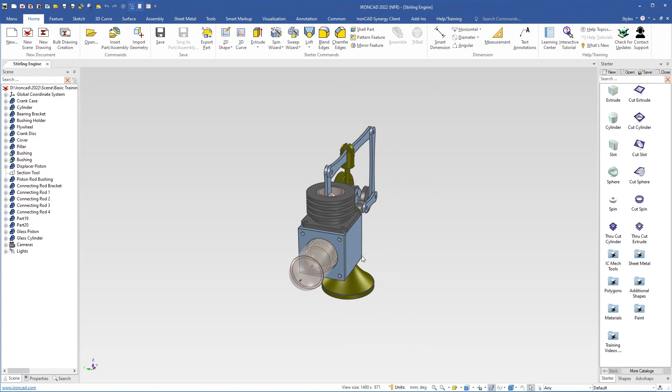Now it's time to prepare to fasten some parts here in the scene, so I will move the camera to cover, and we will add some threaded holes here.

So we come over to the catalogs and click more catalogs, and we will choose ICM Mech, and here we have the hole tool. I will drag a hole and drop it here inside this hole at the bottom, and here in this menu we will select this hole, size M4, length 4 millimeters. None of these boxes should be checked, but this one should be checked so that the thread call out to 2D drawing will be active. So when we make a drawing of the crankcase, this information will be added to the drawing.

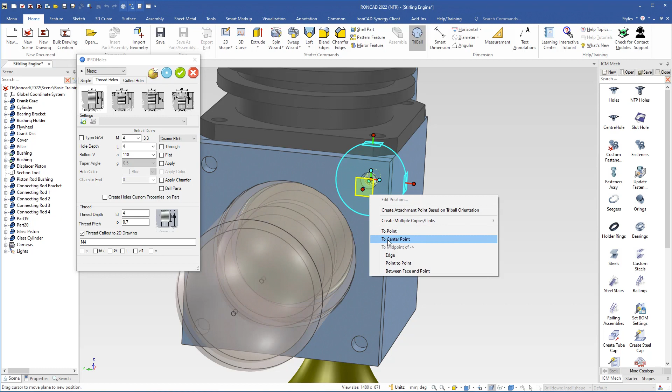So M4, length 4 millimeters, and then I will move this hole so it will be centered in this hole. I will right click this 2D handle, choose the center point of this hole. Then we need 3 more, so I will unlock the triball, right click the 2D handle, choose the center point of this hole. This will be the starting point to copy 3 holes.

So I will lock the triball, select this axis, and then I will right click and hold inside the triball, push, and drop it there and choose link. I need 3 more and 90 degrees. Then I will click OK.

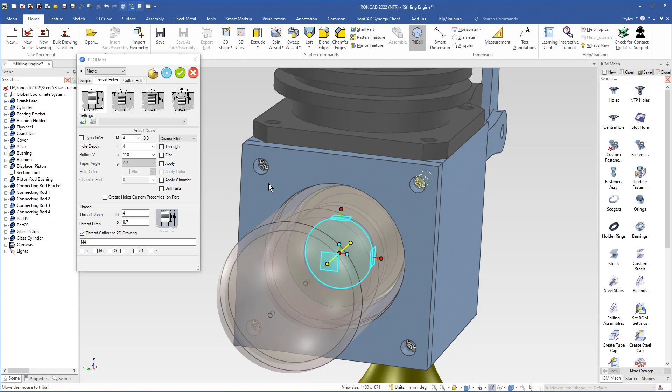Sometimes when you copy a threaded hole, the threads can look a little bit strange. If they do, you just click here the apply button and the threads will look okay again. So I will click apply and exit and turn off the triball.

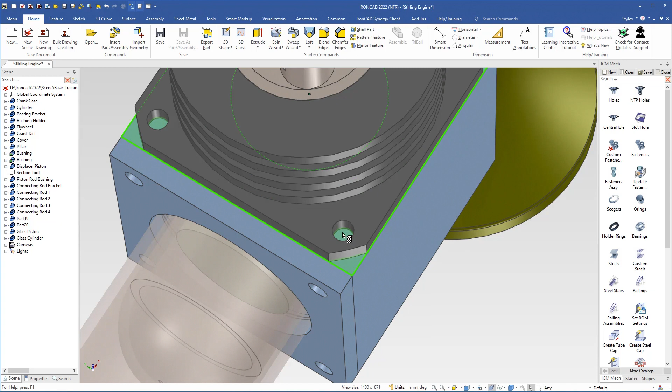Then we come up here, we will add some threaded holes here as well. So I will drag a hole, drop it here at the bottom inside this hole, and it will be the same size, M4, length 4 millimeters. This one is checked, and then I will right click this 2D handle, choose the center point of this hole.

And then I will copy 3 holes. So I will move the triball, unlock the triball, right click the 2D handle, choose the center point of the cylinder, lock the triball, select this axis, and then I will right click and hold, drag, and drop it there, choose link, 3 more and 90 degrees. Then I will click OK.

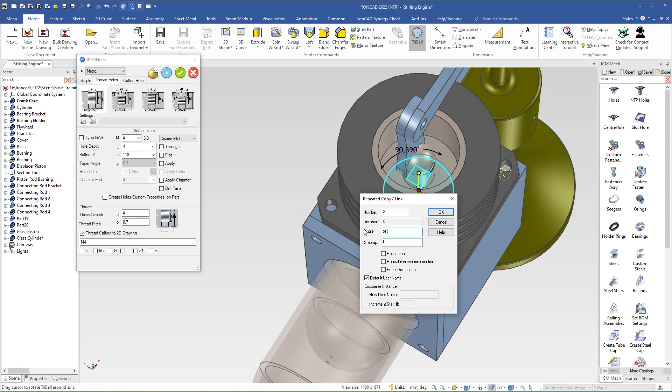And then I click apply and exit and turn off the triball. Then we will come over to this bracket here. We will also add a couple of holes here. So I will drag another hole, drop it here at the bottom.

And I will move the hole to the center. So I will right click the 2D handle, choose the center point of this hole, and M4 and length 4, and this one is checked. So now I will make sure that this 2D handle is selected.

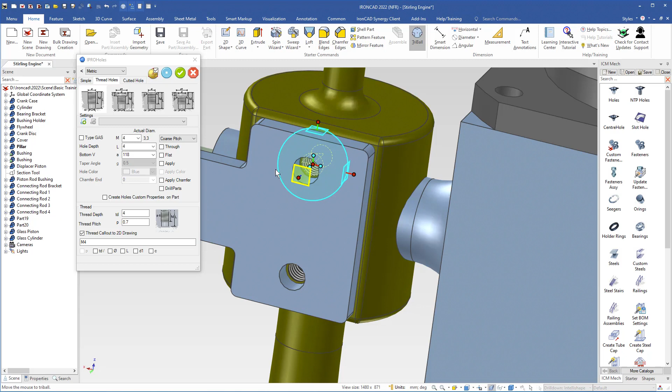Then I will right drag the center handle and use the shift key to snap to this edge, and avoid snapping to a node, because if I do and drop it here, it will be placed here where the node is. So I will snap to the edge of the hole. Here I will let go the right mouse button and the shift key, and then I click link and click OK, and I will click apply and exit and turn off the triball, like so.

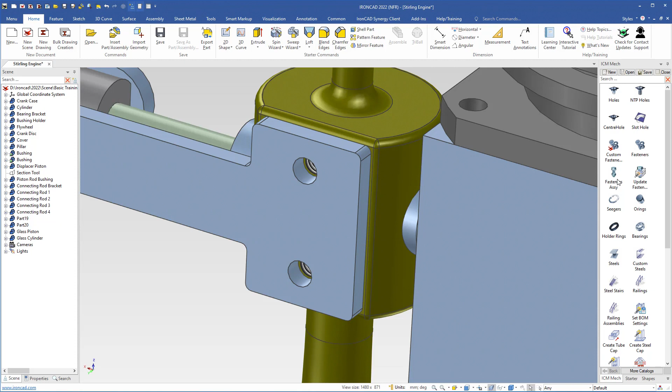Now we will fasten the bracket by using a fastener's assembly we find here in the catalog. A fastener's assembly will give us a screw and a washer at the same time. So I will left drag a fastener's assembly, use the shift key to snap it to this edge, drop it there, and when you do this for the first time, you will have a screw and several washers

and also a nut. But we will not use that type of screw, so we will come over here, click the screw here, then click this drop down button, and we will choose this one. Then we can click update or apply, and we come over here again, it should not be M5, it should be M4, and we can update. It will look like this.

But this washer will be active, but not this one, because we don't need two washers. So we click on this washer on this image, and then we deactivate the washer. Then we can click on this one, and that one should not be active because we don't need it, and we don't need that one either, and not a nut, like so. So now it will look like this type of screw and this washer.

That's all, so I will update it so it will look like this. It should be M4, the length will be 8 millimeters, and this box should not be checked. If it is, it will make holes on the pillar. But we don't need an extra hole right now because we already have a hole here on the bracket, and we also have a threaded hole on the pillar, so we can uncheck this box.

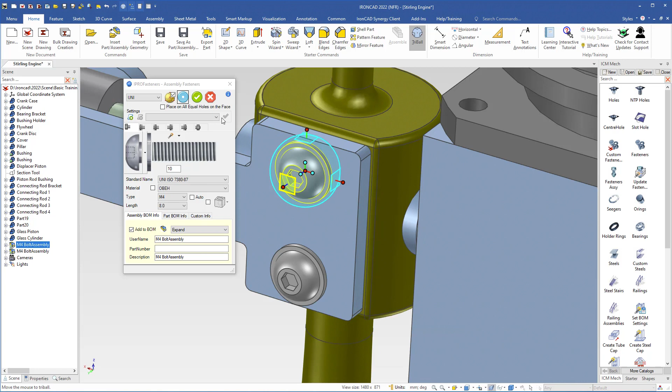So I will turn on the tri-ball, make sure that the 2D handle is selected. Then I will right drag the center handle, use the shift key to snap to this edge, and then I will let go of the right mouse button and the shift key. I will click link, click OK, then click apply and exit, and turn off the tri-ball.

Like so. Now we will fasten the cylinder here. We will do the same. We use a fastener's assembly.

One thing to remember is that this assembly is now selected. If I now add another assembly or a part to the scene, that part or assembly will become a part of the selected assembly. So for instance, I will show you.

If I drag another fastener's assembly here and drop it here in this hole, now this assembly becomes part of this one because it was selected when I dropped it here in the scene. So if we look here in the scene browser, we see that we have only 2 bolt assemblies, but in the scene we have 3. That's because if we expand this one here, we see that the new assembly became a part of the selected assembly. If you don't want it this way, you must make sure that no assembly is selected when you drag and drop a new part or assembly into the scene.

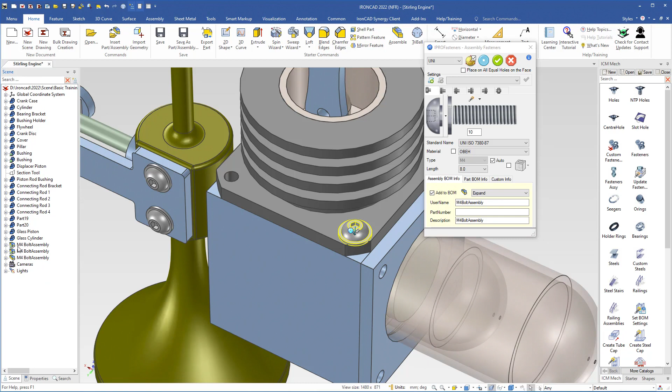So here I will click cancel, and now I make sure that no assembly is selected. Then I will drag another Fasteners Assy and drop it here, using the shift key to snap to the edge. Now we see that we have 3 bolt assemblies here in the scene browser, and we have 3 bolt assemblies here in the scene.

So we make sure that we have M4, length 8 millimeters, that box will now be checked, and add to bill of materials. Now we will add 3 more bolt assemblies.

So I will turn on this tri-ball, loosen it, and right click the 2D handle, choose the center point of the cylinder, lock the tri-ball, and select the axis. Right click and hold, drag and drop it there, choose link, 3 more, 90 degrees, then click OK, apply and exit, and turn off the tri-ball.

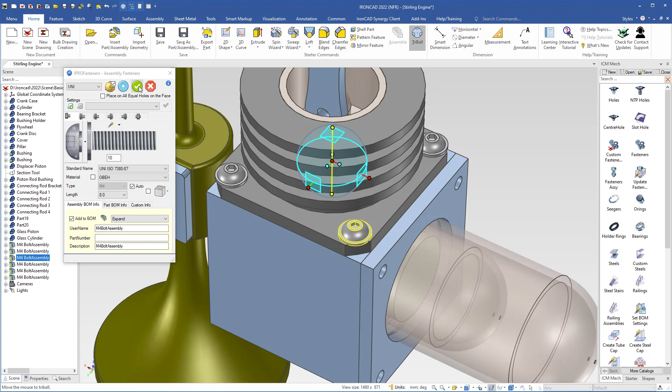So we will continue to fasten the cover, making sure that no assembly is selected. I will left drag a Fasteners Assy, using the shift key to snap to this edge here.

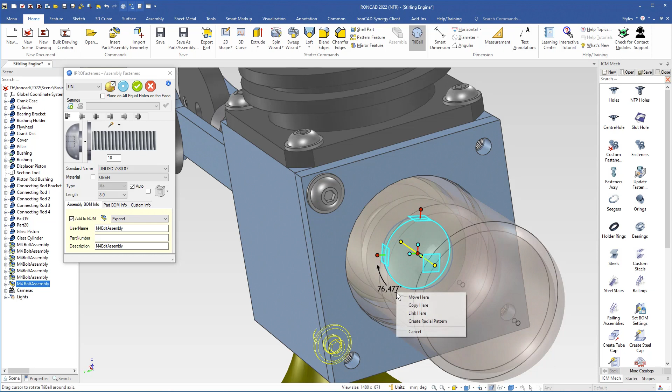It is M4, length 8 millimeters, and I will copy this bolt and washer. I will loosen the tri-ball and right click the 2D handle, choose the center point of this hole, lock the tri-ball, select the axis, right click and hold, drag and drop it there, choose link, 3 more, and 90 degrees, then click OK. Then I will click apply and exit and turn off the tri-ball.

So now we have fastened the bracket, the cylinder, and the cover. I also see that the cover has a little bit of jagged edges, so I will select the cover, go over to the properties, and change the smoothness to 60 and hit enter.

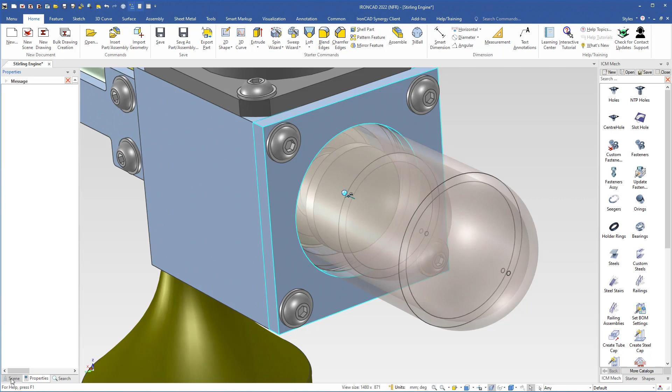So now I will move the camera to top front right and fit scene, and then I will save the scene and we can continue.